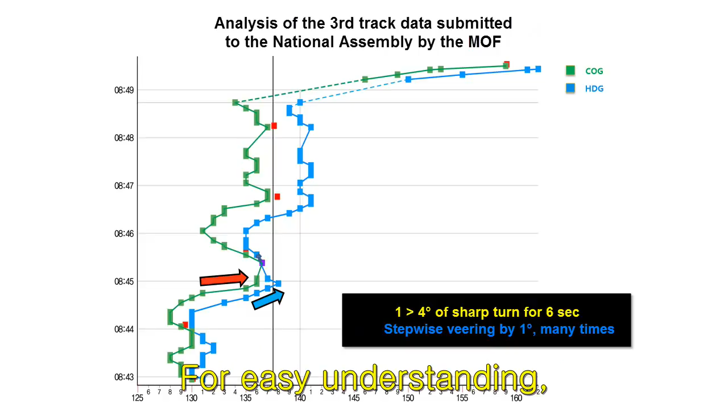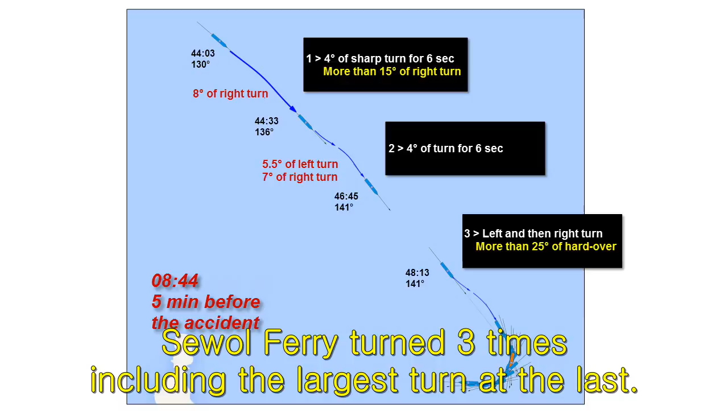I showed you this picture in episode 1. This picture expresses the tracks of Sewol Ferry based on HDG. For easier understanding, this may be expressed in another kind of picture. This is a new expression of the previous picture. As shown, Sewol Ferry turned 3 times, including the largest turn at the last.

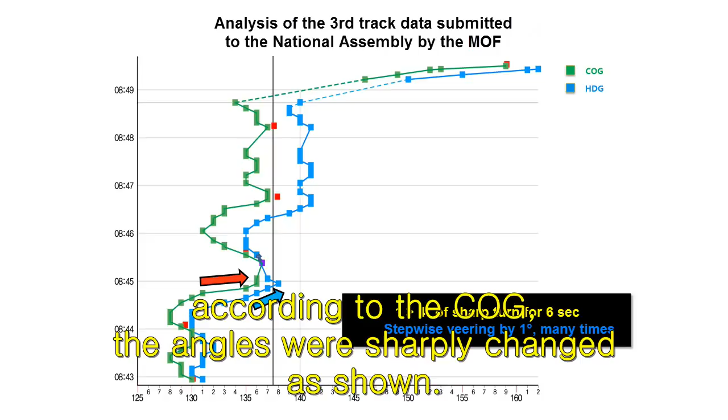What's important in this picture is that, according to the HDG, the angles were changed stepwise as shown, but according to the COG, the angles were sharply changed as shown. The data was verified based on angles until now.

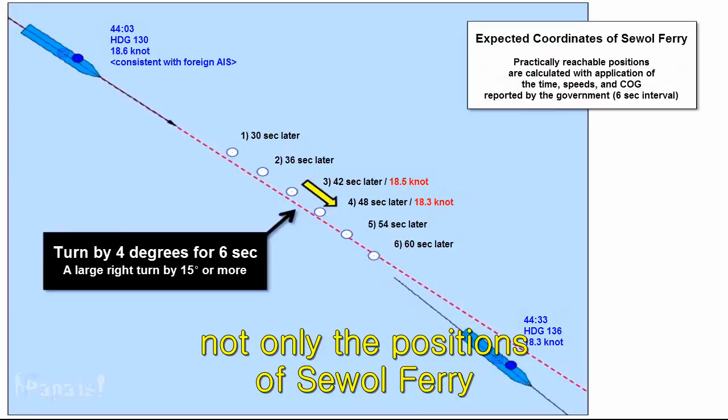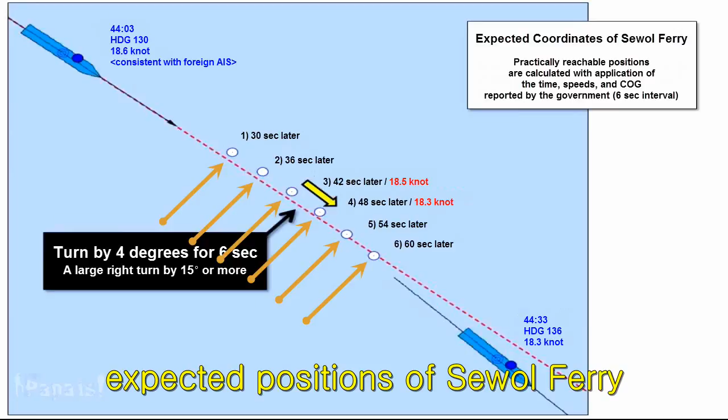From now on, the data will be verified based on positions. According to the data reported by the government, not only the positions of Sewol Ferry but also the time, speeds, and COG may be identified. That is, it's possible to know the duration, direction, and speed of sailing. In the picture, white circles show expected positions of Sewol Ferry obtained by this method.

The ships in the upper and lower parts show the positions where foreign AIS information is consistent with the government's AIS information. Foreign AIS information is not dense. Therefore, I had no way but to trust the government's data, and I wanted to verify the government's data.

The yellow arrow means the section where veering was done by 4 degrees for 6 seconds. Such an angle change requires veering the helm by at least 15 degrees. Blue circles mean the positions reported by the MOF.

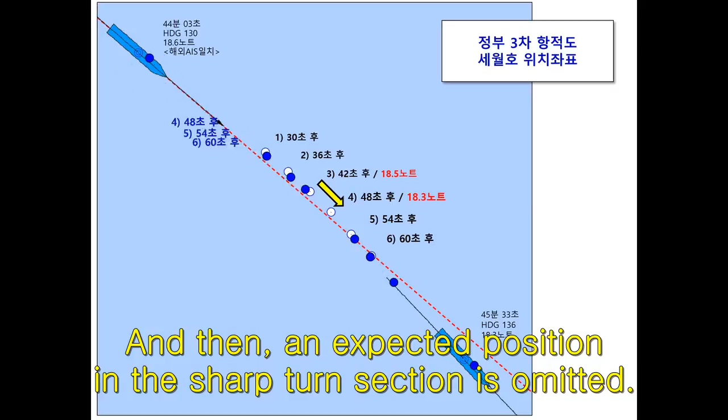Before the sudden angle change, the positions reported by the MOF are almost the same as the expected positions, within GPS error allowance. And then, an expected position in the sharp turn section is omitted. As shown, successive 3 positions are concurrently shifted downward.

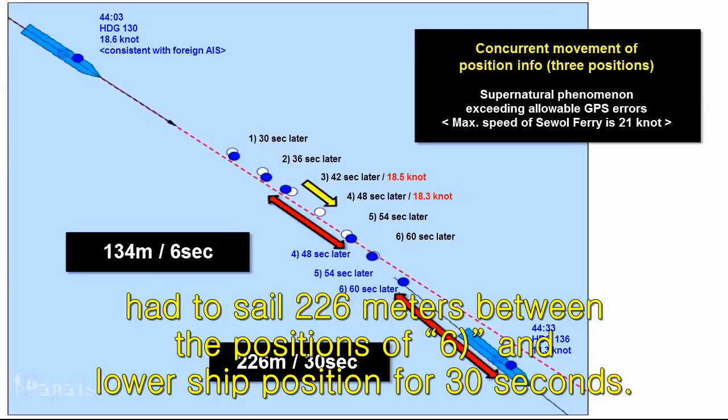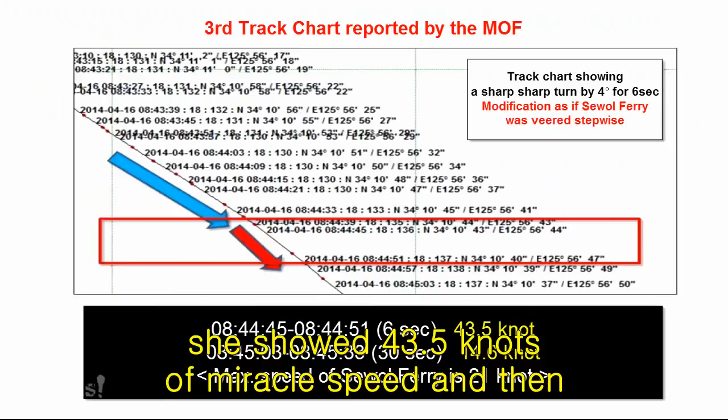As a result, she had to sail 134 meters between positions 3 and 4 in 6 seconds, and had to sail 226 meters between position 6 and the lower ship position in 30 seconds. As shown, the maximum speed of Sewol Ferry was 21 knots, but she showed a miracle speed of 43.5 knots, and then 14.6 knots.

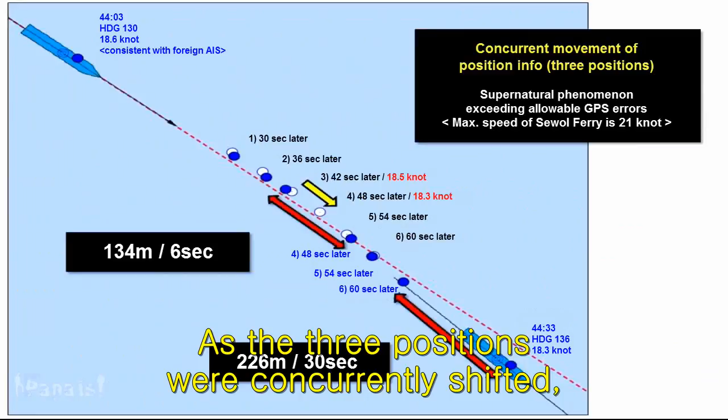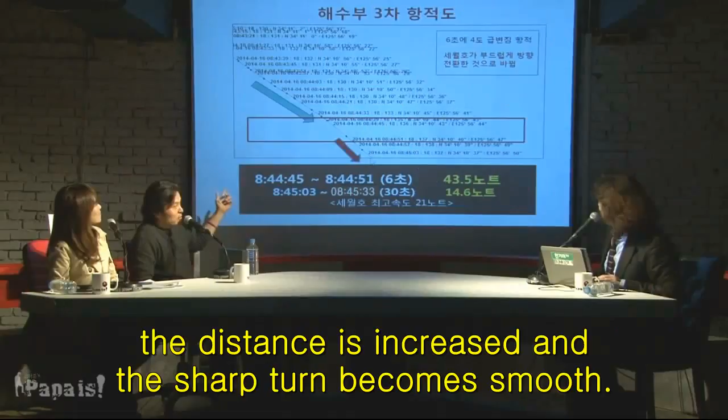In fact, it's impossible to reduce the speed from 43.5 knots to 14.6 knots in such a short time. As the 3 positions were concurrently shifted, the distance of this section is increased but the distance of this other section is reduced. As shown, when such 3 positions are shifted downward, the distance is increased and the sharp turn becomes smooth.

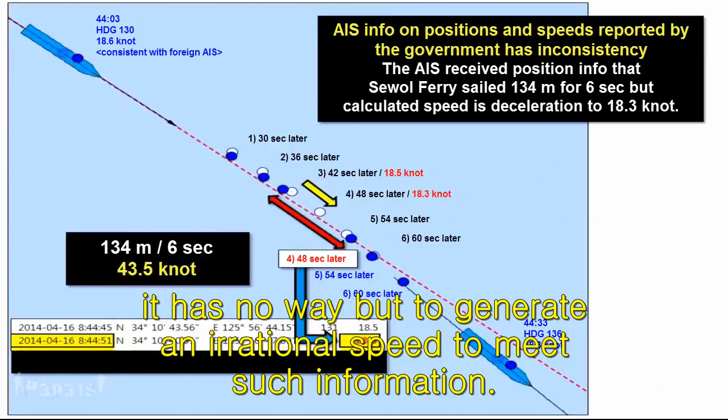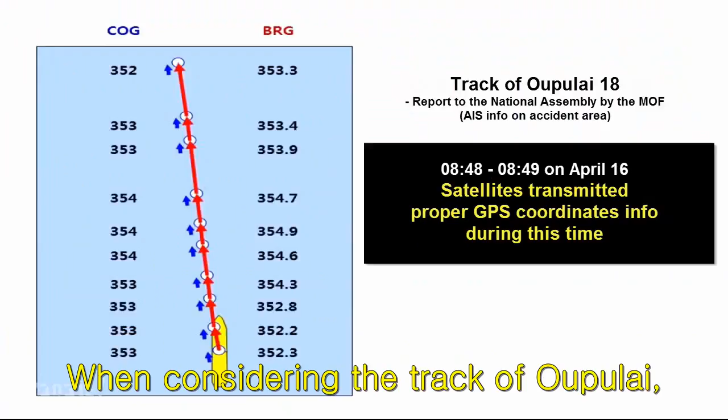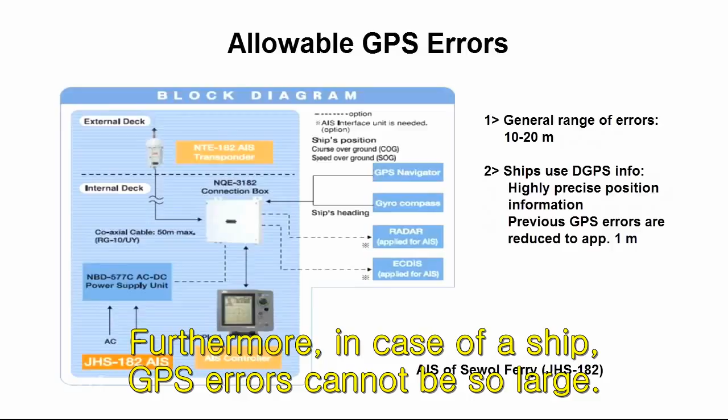As AIS has no ability to consider abnormal information, it has no way but to generate an irrational speed to meet such information. This irrational speed is not related to GPS errors. When considering the track of Oupulai, satellites were transmitting proper GPS data to Oupulai. Furthermore, in the case of a ship, GPS errors cannot be so large. GPS errors of a ship do not exceed 1 meter.

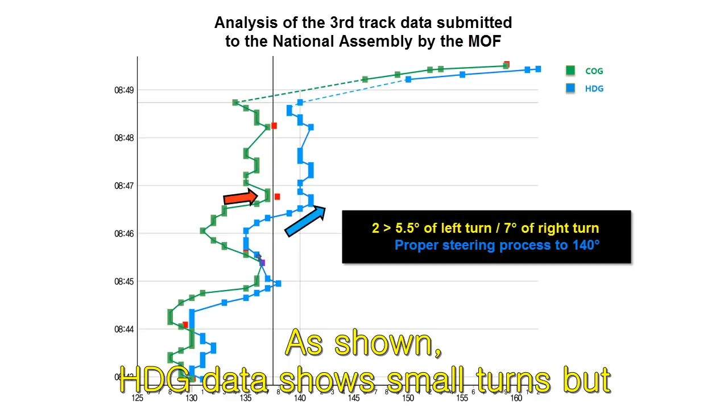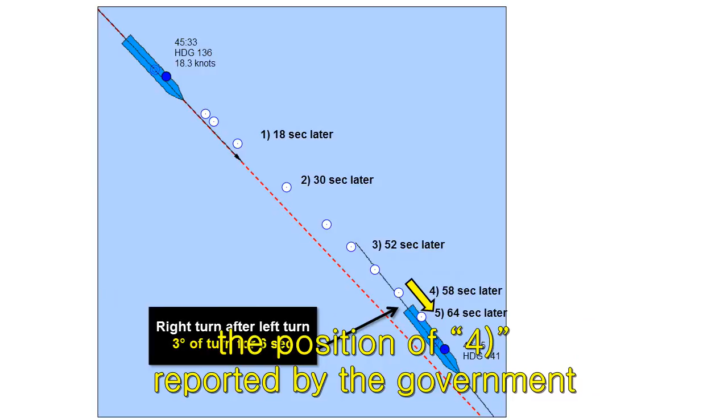This is a second suspicious section. As shown, HDG data shows small turns but COG shows large turns. The first 3 expected positions are consistent with the positions reported by the government, but the position of 4 reported by the government contacts expected position 5, as shown. This kind of phenomenon repeatedly appears in the sections that have the suspect of sharp turns.

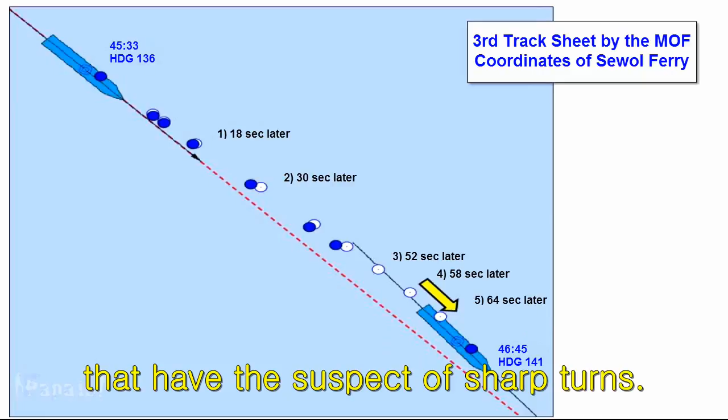Let's see the next step. As shown, there is an empty expected position. This is a section that is suspected to have a large turn.

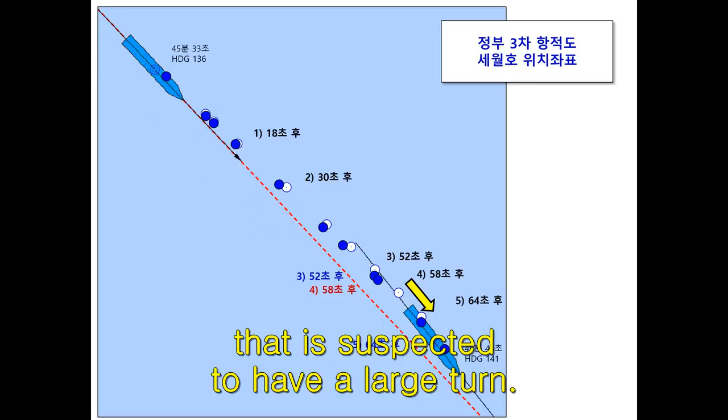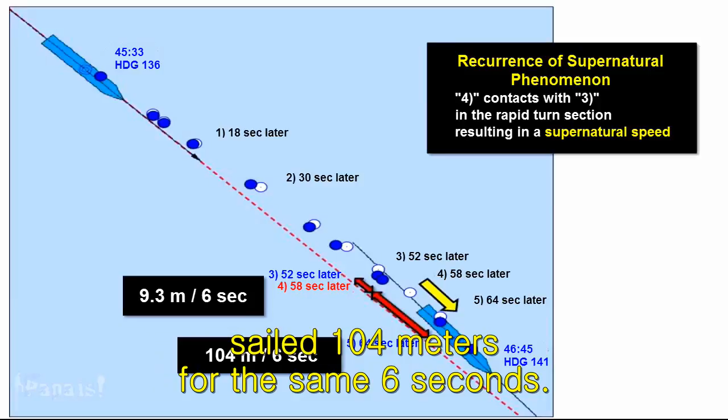The position for 4:58 seconds later contacts with the expected position of 3:52 seconds later. As shown, Sewol Ferry sailed 9.3 meters for 6 seconds and then sailed 104 meters for the same 6 seconds.

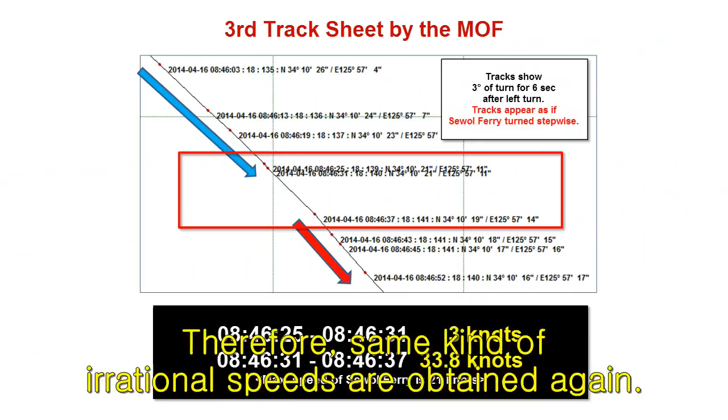The speeds are irrationally changed as shown in the suspicious sections, as if the data protects the crew. Therefore, the same kind of irrational speeds are obtained again. As a result, a sharp turn becomes smooth by the same method. This is the analysis result of the tracks reported by the MOF.

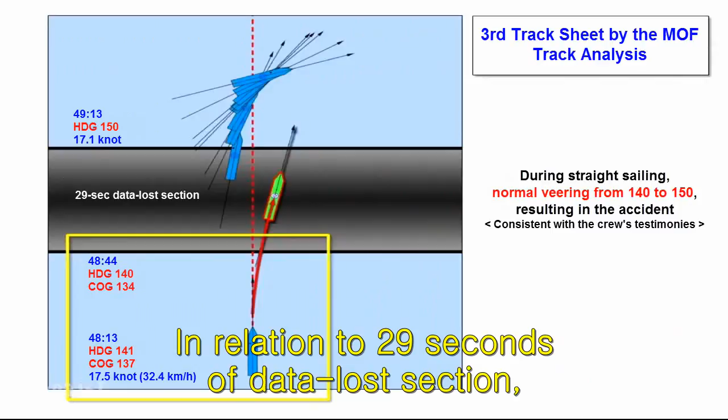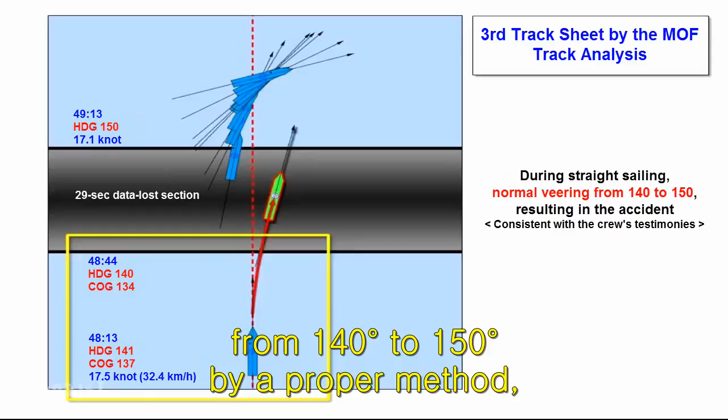In relation to the 29 seconds of data loss section, the crew asserts that they veered the helm during straight sailing, from 140 degrees to 150 degrees by a proper method, just before the accident. Let's look at this yellow rectangular section carefully.

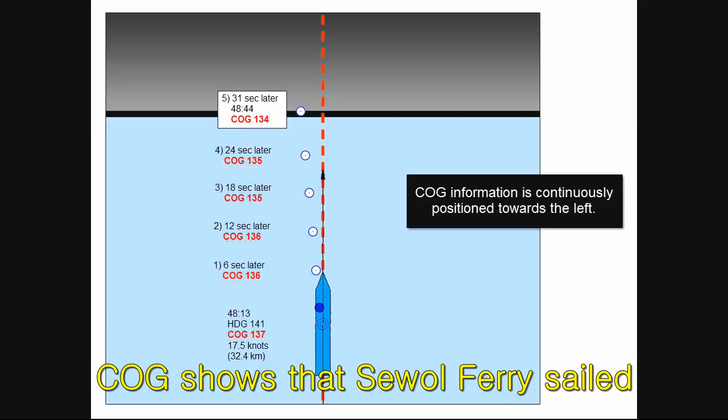COG shows that Sewol Ferry sailed to the left like the expected positions in the picture. The first 3 positions are located similar to expected positions although they are somewhat lower. And then, next 3 positions appear, but a position is quite different from the expected corresponding position.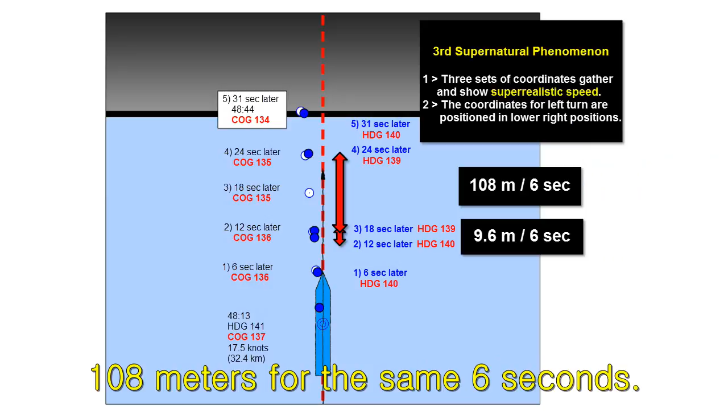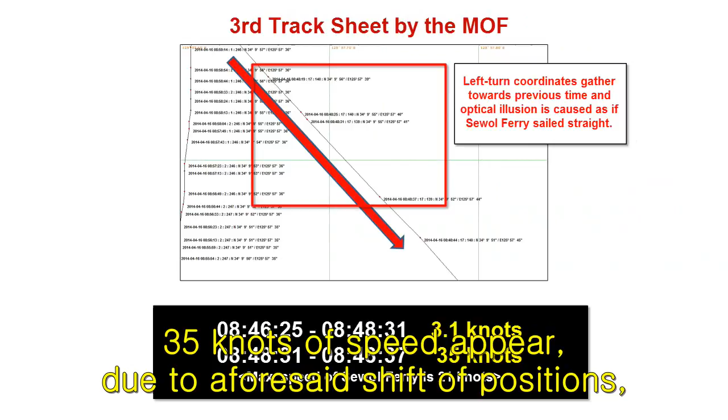Therefore, Sewol Ferry had to sail 9.6 meters for 6 seconds and then 108 meters for the same 6 seconds. As shown, 3.1 knots of speed appears and then 35 knots of speed appears, due to the aforesaid shift of positions, resulting in an optical illusion that Sewol Ferry sailed almost straight.

Therefore, it is suspected that somebody might have moved the positions intentionally. Sailors do not accelerate a ship when veering the helm.

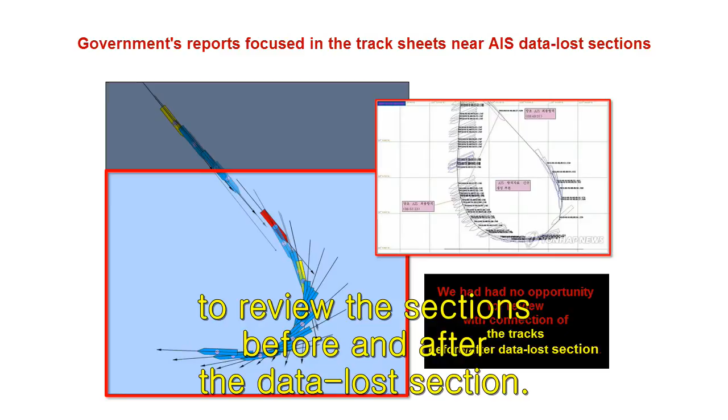The reports made by the governments are mostly focused on the section where AIS information is unavailable. Therefore, we had no opportunity to review the sections before and after the data loss section. The data at this point and this point are available in foreign data.

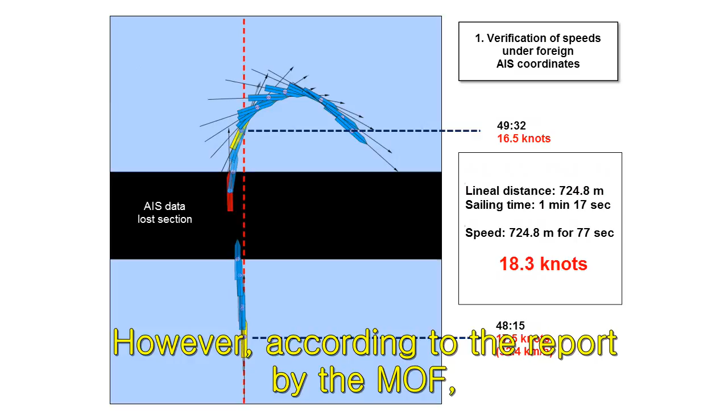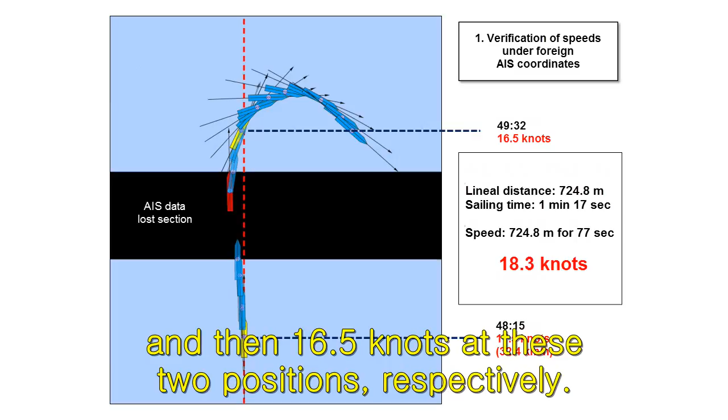As the information on the time is available, the speed was obtained and was 18.3 knots. However, according to the report by the MOF, Sewol Ferry sailed at 17.5 knots and then 16.5 knots at these 2 positions, respectively. If true, Sewol Ferry might have been accelerated for a while in this section.

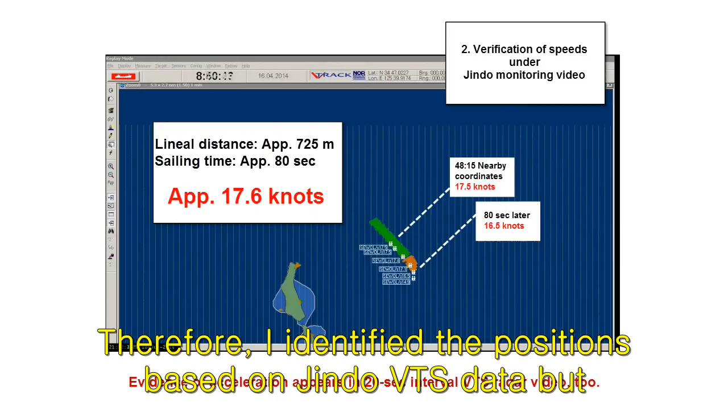Therefore, I identified the positions based on Jindo VTS data, but this data did not give me the information in detail. The information was available every 20 seconds.

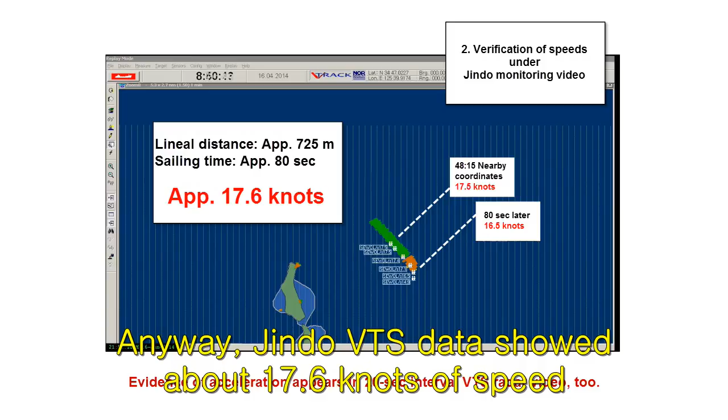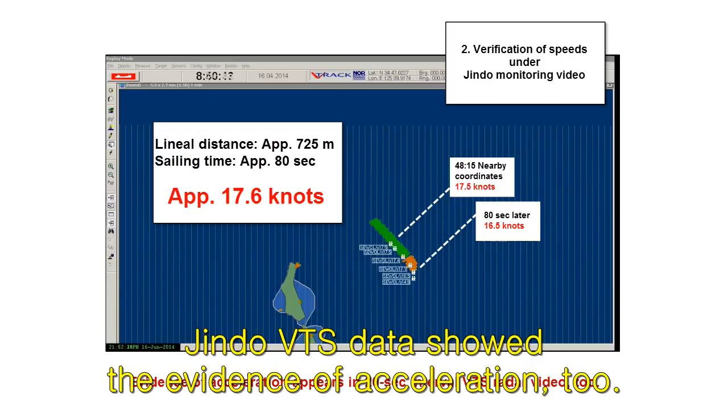Anyway, Jindo VTS data showed about 17.6 knots of speed in about 725 meters of section for 80 seconds. Jindo VTS data showed the evidence of acceleration, too.

The MOF reported the tracks in the most detail. As shown, about 18.3 knots of speed appears, too. When considering the report by the MOF, about 21 knots of speed is required in the data loss section.

However, sailors say that such rapid acceleration and deceleration isn't possible for a 6,000-ton ship like Sewol Ferry in as short as 29 seconds of section.

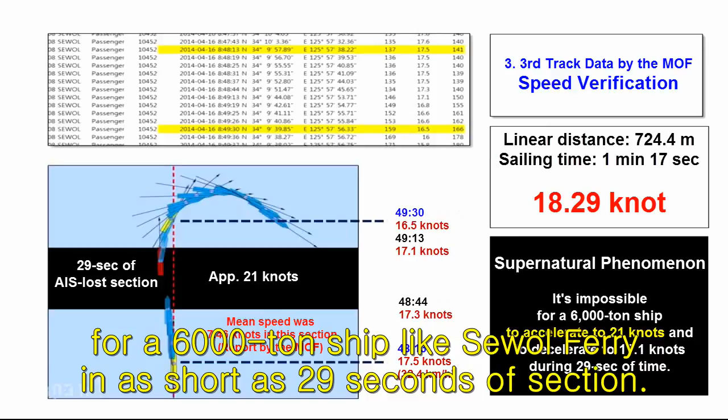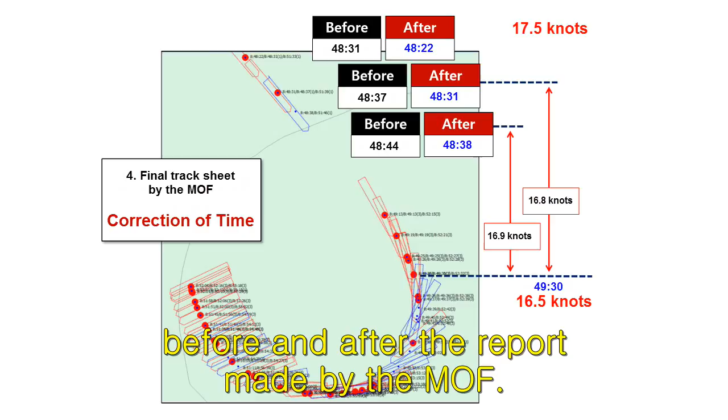This is the final track sheet reported by the MOF. This picture shows the time before and after the report made by the MOF. The MOF corrected the time with maintenance of previously reported coordinates, saying that the temporal differences in the time to send and receive information were corrected.

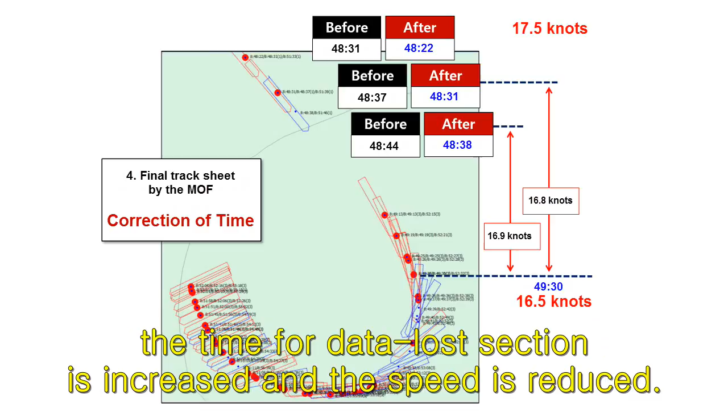By doing so, the time for the data loss section is increased and the speed is reduced. I verified previous data using the final track sheet.

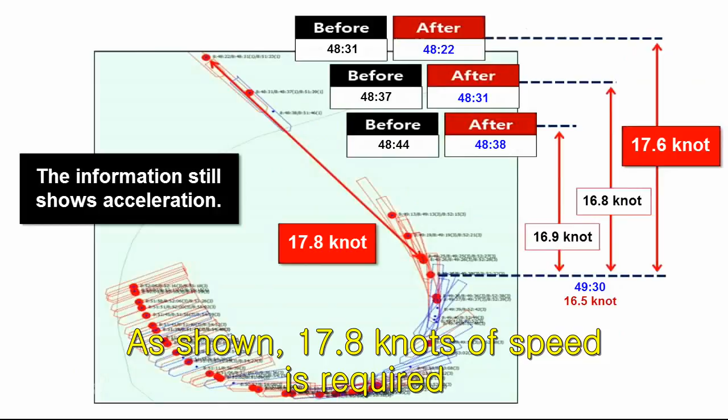The evidences of acceleration exist still. As shown, 17.8 knots of speed is required even in assumption of a linear track, but this speed is still higher than the 16.5 knots of speed reported by the MOF.

A sailor said during an interview that no ship is accelerated during veering the helm, that the speed may be reduced rather than increasing, and that the crew of Sewol Ferry should be investigated to identify the reason for acceleration. Nevertheless, it's not clear whether the prosecutor and police will investigate the crew to identify this issue.